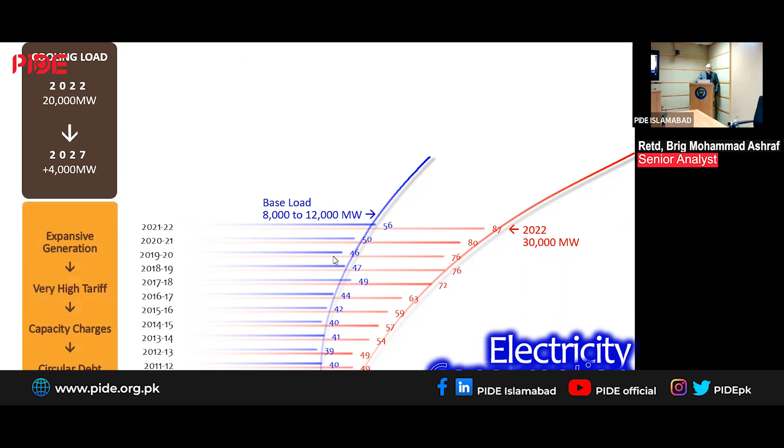Now this additional 20,000 forces the government to kick in the most expensive generation, where they generate electricity at about 80 to 90 rupees and have to sell it at about half the price, losing about 40 to 50 rupees per kilowatt hour. It also results in high tariff and capacity charges, because you have to maintain this capacity and circular debt.

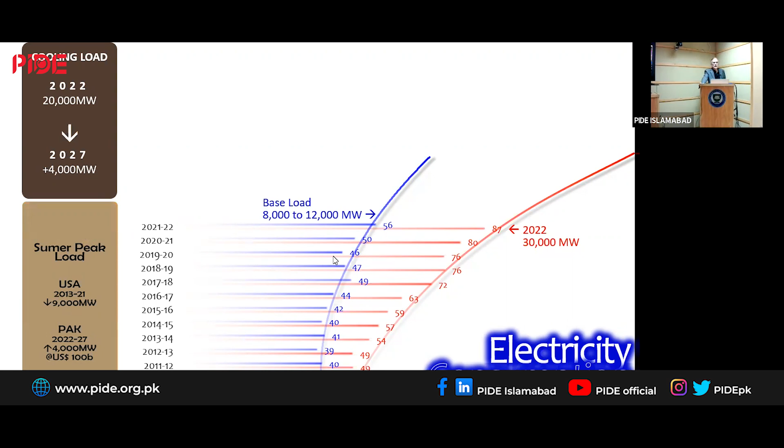Now, that is the starting point. Interestingly, once I started looking around, it was very interesting to see that the US in the past 8 years has actually reduced peak load by 9,000 megawatts, whereas Pakistan is set to increase peak load by another 4,000 megawatts in the next 5 years. That entails an investment of about $100 billion, which we don't have. So if it's not bad already, the worst is yet to come.

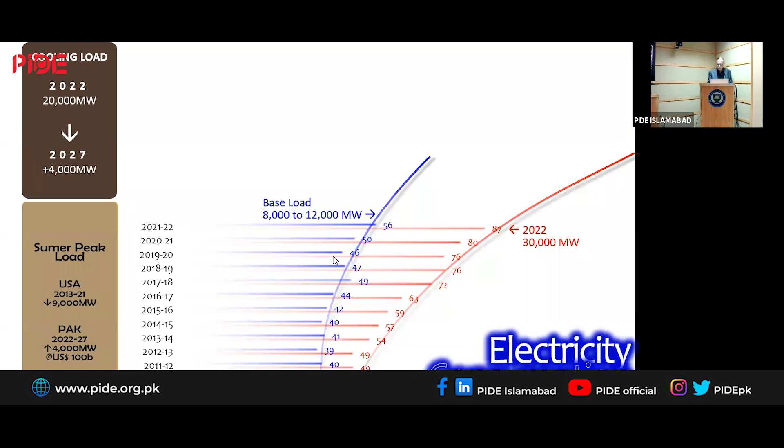And that is troublesome, obviously for economists and others, but also for housing. Now why am I focusing on housing? Because Pakistan happens to be the only country in the world where our residential or domestic load is far in excess of other categories like industrial load.

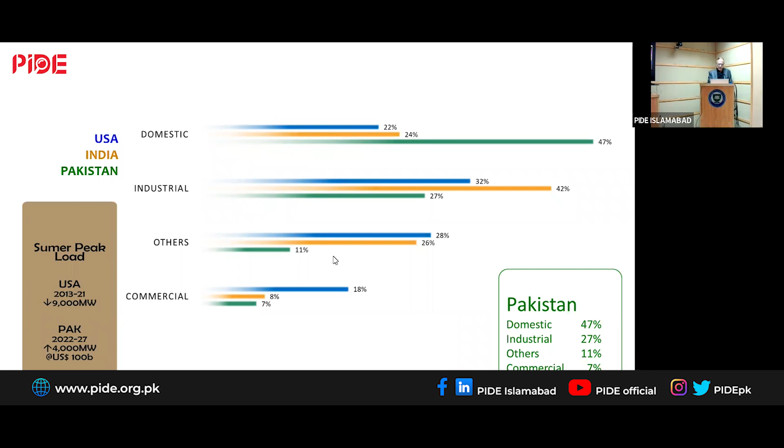As you can see here, the blue for USA shows 22% of entire electricity going to the domestic sector, India 24%, and Pakistan 47%. Now compare that with the industrial load figures, and you'll find we're consuming about 27% on industry and 47% on domestic load. This is a very unique situation, I think only in Pakistan.

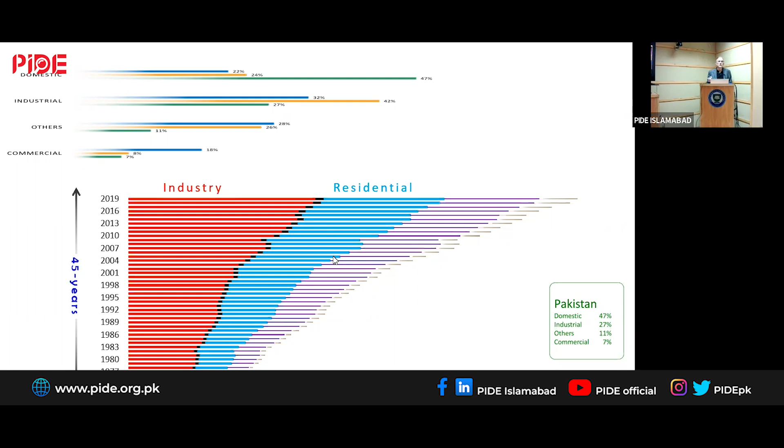I looked at about 45 years of EU data, and you can find consecutively the red bars are industry, which is almost more than twice the residential and other areas. So we have this issue of non-productive energy consumption, which is not adding to GDP but only going to the people, with tariffs going up. So this crisis is becoming, I think, primarily because consumption is on the wrong side of the equation.

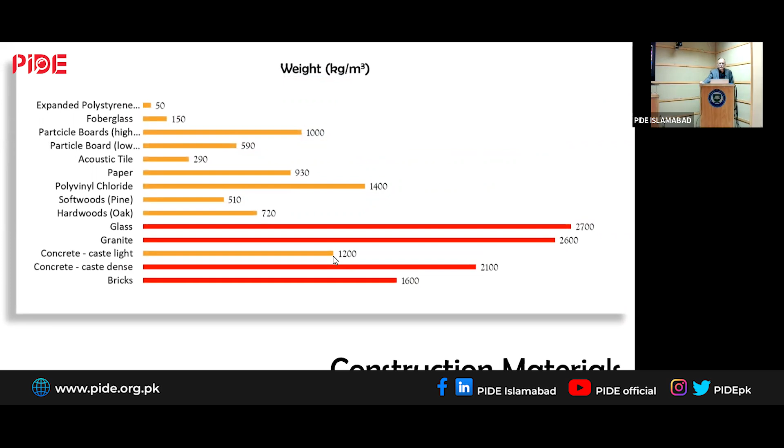Now looking a little deeper, this is how our construction materials are. Here you find those in red are the construction materials we use, and they also happen to be the heaviest in weight. That adds to one side of the problem.

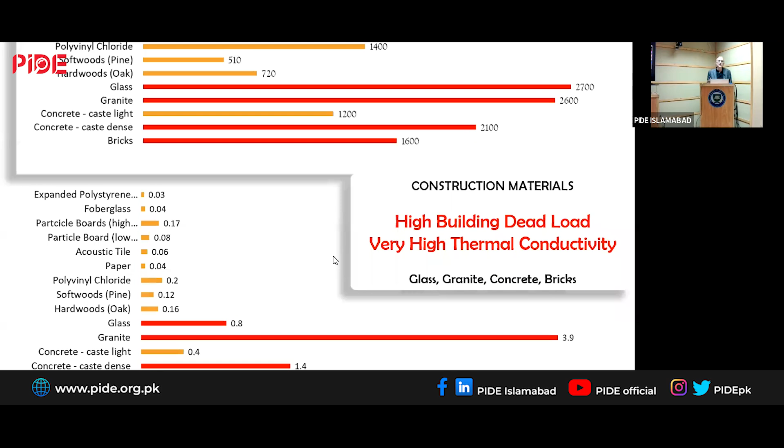The problem with the domestic sector is that in summers the demand rises very high, whereas in all other sectors like industry and agriculture, it's a constant demand. But this is where you have to build the extra capacity, which causes all the problem.

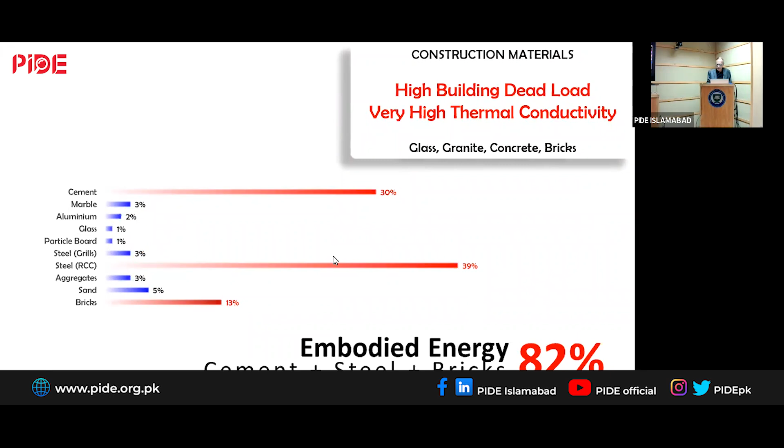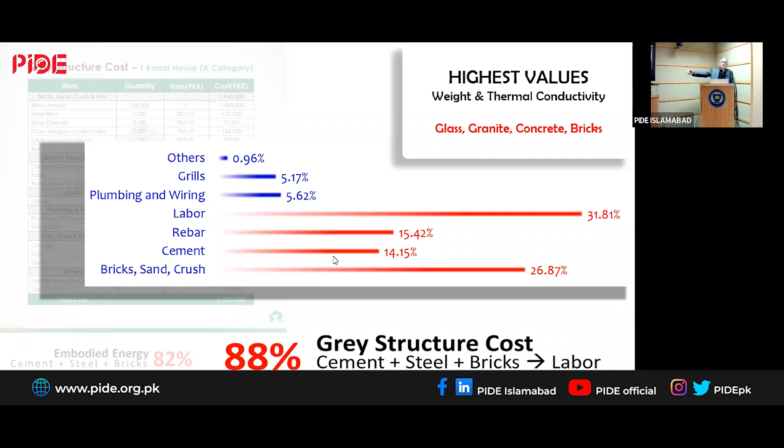Now let's take it further. Again, the construction materials we are using - cement, steel, and bricks - consume about 82% of the embodied energy, besides having high thermal conductivity. And if you look at the cost structure of the gray structure costing, 88% of the cost again goes to the same three elements - cement, steel, and bricks - which leads to extra labor cost. So we can conclude that the energy consumption in the domestic sector can be attributed to the construction material, which leads to the extra high labor cost.

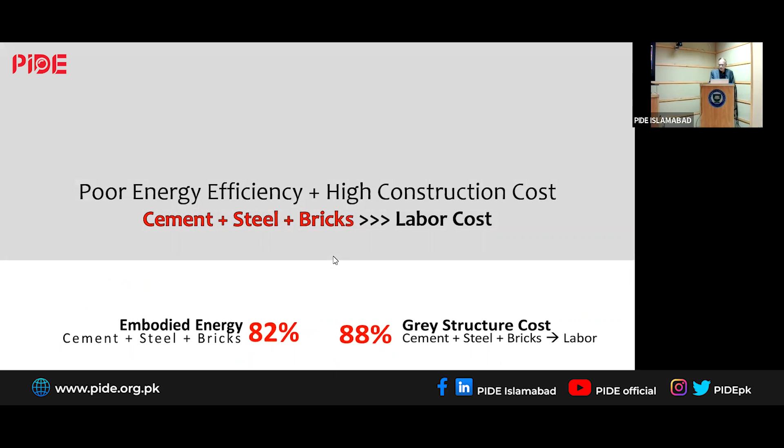And if we are able to look into this construction material, I think the problems will start getting into the solutions.

Now, incidentally, I look at it that we have one of the best opportunities. Our environment is very favorable, we have very moderate climate, we have abundant solar energy - something like 325 days in a year. Geothermal energy, I'm going to talk a little later, but Pakistan happens to be one of the most gifted, blessed countries, which we are not using.

And we do use very superior construction materials compared to what the West is using. They just put timber and some cement boards and put some insulation, and that is their house. We, on the other hand, use the material which only billionaires can afford in the West, but here we use it plentifully. So we are using superior construction material, but what we are getting is very high energy consumption and very high construction cost. So it doesn't make sense on both accounts.

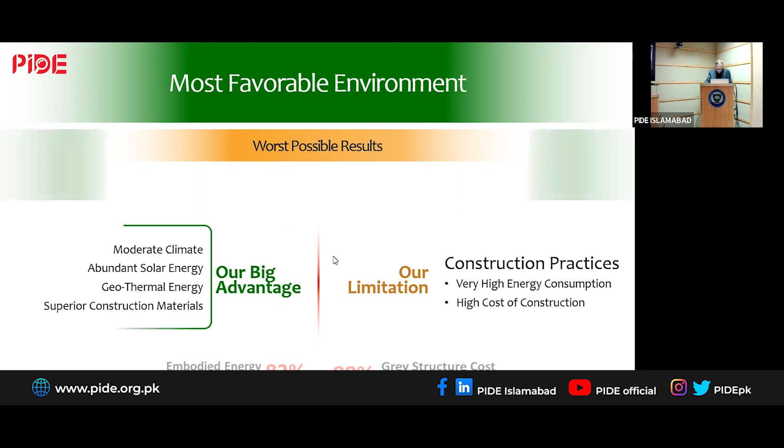Incidentally, I feel if we take advantage of the environment that we have and other things, we are in an ideal position to actually design some of the most efficient construction models here in Pakistan. And that is what we are going to try and come out with today. In this, we have to take advantage of the climate, the availability of solar energy, geothermal energy that is right here, and also the local material that we are using. Let's try and move towards that area.

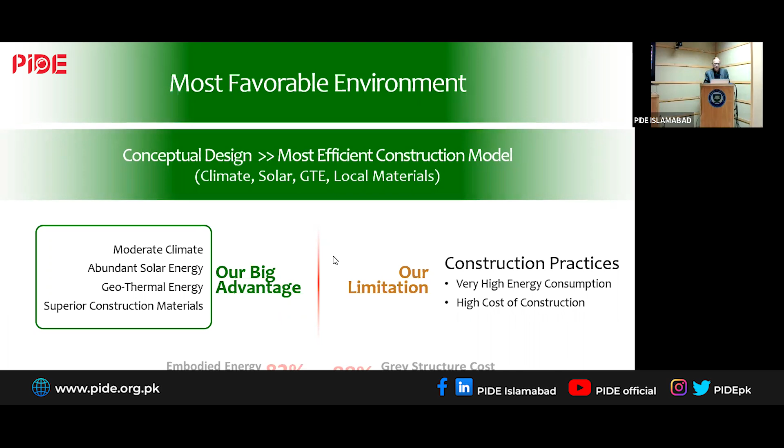Now, first of all, I am looking at what we can do with the traditional construction material and with existing buildings, which are made of bricks, mortar, cement and steel. I feel because of the very high thermal conductivity and the embodied energy that goes into it, if we just put an insulation envelope around this building, we can eliminate the impact of the weather, which actually affects the building and causes very warm homes during summers and cold during winters.

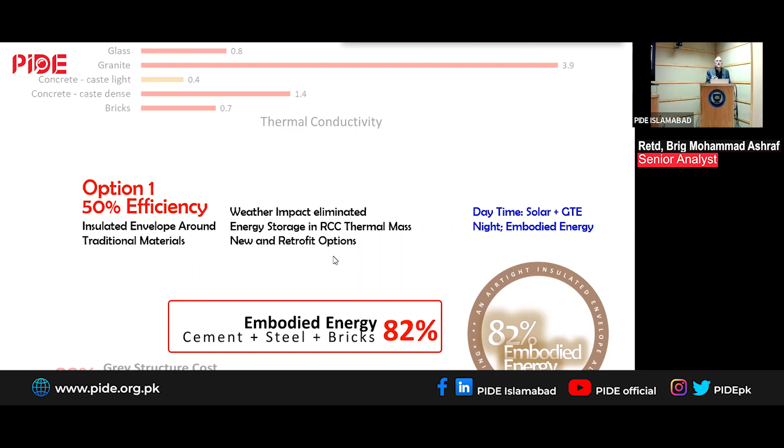And the classic example is the upper story of all our houses, which with the RCC roof, it's unbearable - even at 2 o'clock at night, it's not comfortable. And obviously the energy consumption is very high and the comfort is not there. But imagine if there was an insulated envelope around the building - this very embodied energy and the thermal conductivity would have helped you, as we are trying to do here.

So it is perfectly possible for us during daytime to use solar energy to drive one or two blowers, push the air - I'm not talking of water - push the air below the surface and then get a temperature differential of about 15 degrees plus. All this is running on solar. Once this energy goes into the building, it gets stored into the thermal mass that we build in, and that will last you for the night also. So that is how we are going to articulate this arrangement that I'm going to be talking about today.

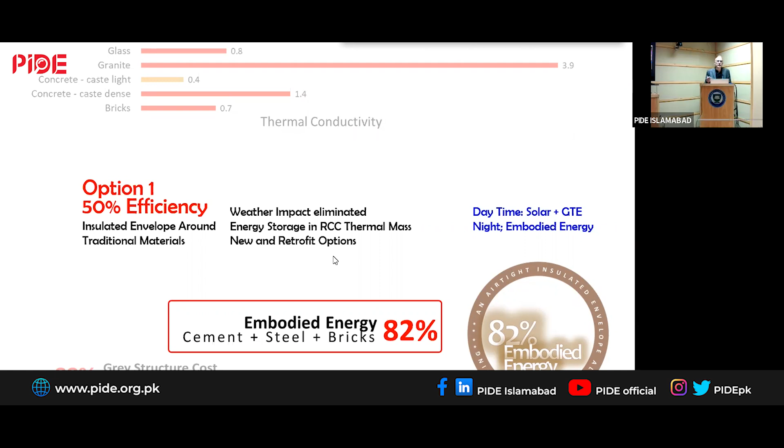The second proposition I have is actually adopting passive house standards, which envisage more than 90% energy efficiency. And if we use along with it some light construction panels and use RCC slab for the storage of this energy, we will end up in an arrangement where probably we should be able to have centrally air conditioned and centrally heated buildings at zero cost of energy.

So that is perfectly possible, I think. We are working on it, and probably, hopefully in a few months' time we'll start with some prototype in which we are going to test it together.

So during daytime, you're using solar and geothermal energy, and this energy is also being stored in the RCC floors of the building. At night time, that stabilizes the house inside the rooms. The construction time is also drastically reduced, which affects the labor cost, and obviously the cost impact is also there.

Now I'll just, for illustration, flash some of the construction materials which are available. Most of them are available in Pakistan. Some are not there, but they are cost effective and can be brought in if we are moving in this direction.

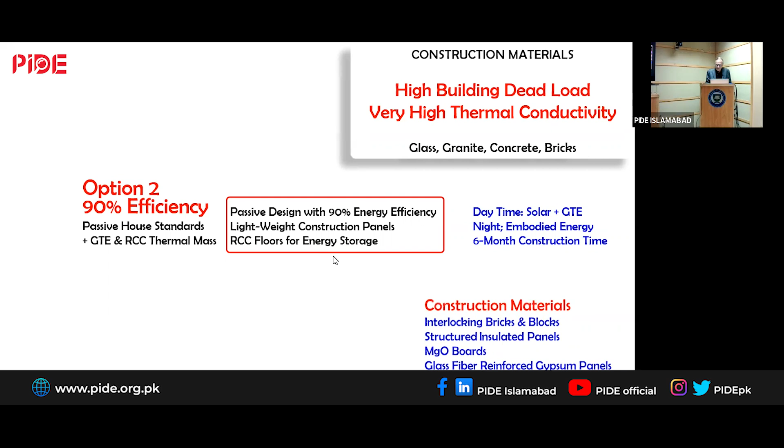The first is the simplest, which actually started being manufactured in Pakistan, but somehow or the other it hasn't taken off. This is interlocking bricks and blocks. You do not need plaster and cement for the bonding purposes, you can just place one brick and the next brick and it gets locked. It has a very good joint, and the laying time is about 14 to 15 times faster. The cost is less, and a very neat finish can be obtained from this.

The Boring Company is championing it. Elon Musk thinks that by selling these bricks at 1/5 the cost of normal bricks in the USA, he can recover the drilling cost through this particular method.

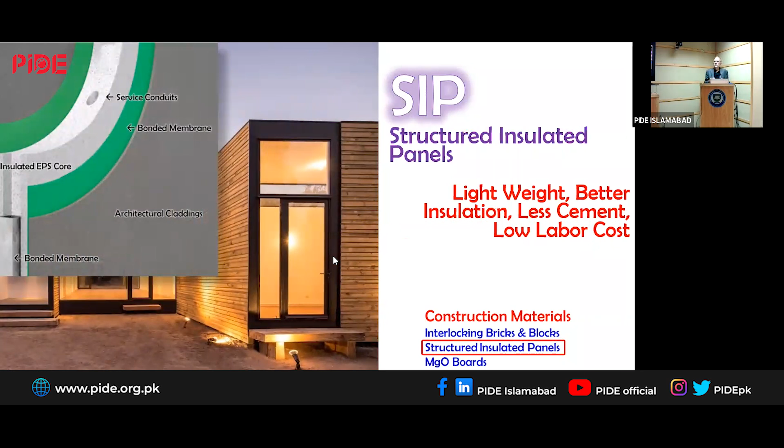So there are quite a few places, I'll let you know. In Lahore, there is a very modern plant being set up by one of the bigger industrial groups, and also there are some others at the local level.

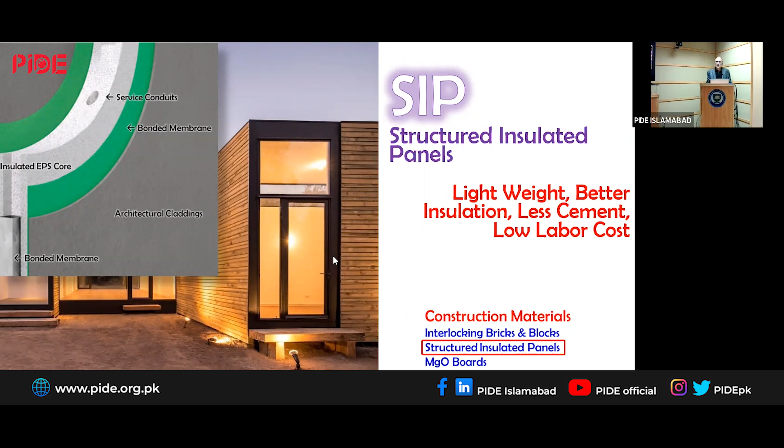Structured insulated panels: luckily there are quite a few, about half a dozen manufacturers in Pakistan. These are sandwich panels, which have insulation inside as the core, and then boards on both sides. It could be cement board, finished cladding or paneling, whatever it is.

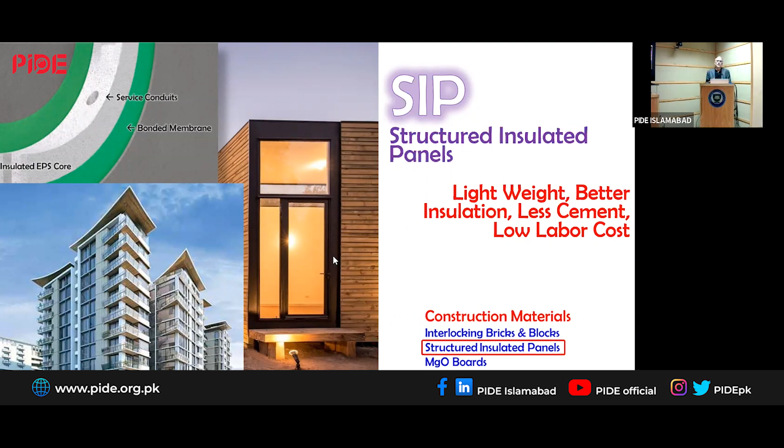Now, next I'm coming to magnesium oxide or magnesium oxide sulfate boards and panels. This is one of the best construction materials, and incidentally Pakistan does have sufficient magnesium if we want to get into it. This could save a lot of weight in construction, it provides very high insulation, it is practically fireproof, and the saving in cement and labor cost is also very appreciable.

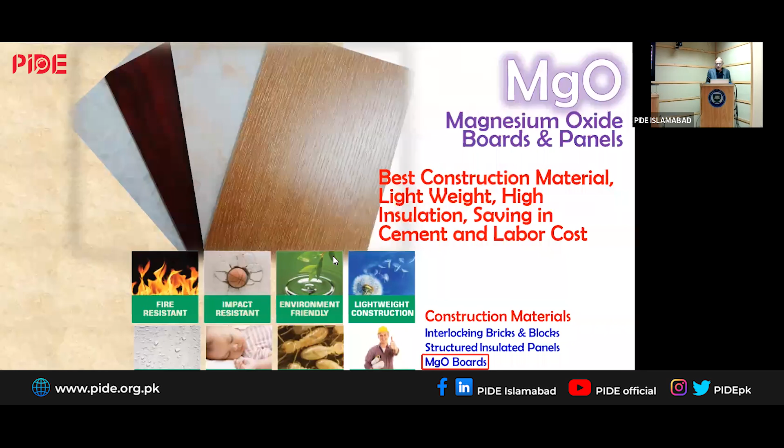Glass fiber reinforced panels: we all know that Pakistan has abundance of glass fiber reinforced gypsum panels, we have abundance of gypsum in Pakistan. This very technology was discovered about 20-25 years ago, and the patent holder happens to be a Pakistani scientist in Georgia. So he offered this technology free of cost to the government. Nobody showed any interest, so he ended up doing this in India.

And India today is actually benefiting a lot from this. The picture you find on the screen is also from one of the Indian projects, where you find a 4-story apartment block with these panels being erected. There's a huge saving in cost, huge saving. It's better insulation, it's very, very speedy, and the finish is also much better than that.

Especially for high rise, this is one of the best materials. We have a lot of gypsum, but we are wasting it, and this is one area.

In fact, I talked to Dr. Shahid Qureshi, and he suggested that 20 years back, it was the right decision, but today if you want to go for panels, then go for the magnesium oxide boards and panels. So we can leapfrog to magnesium oxide, but also we can use gypsum productively, far more productively than we are doing today.

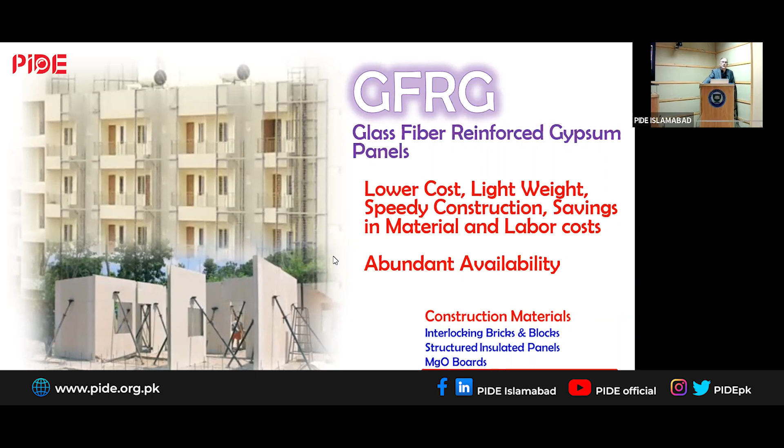Investment is also very low, and I think it's one of the things that should be coming to Pakistan sooner than later, especially considering the kind of situation the steel industry has in Pakistan.

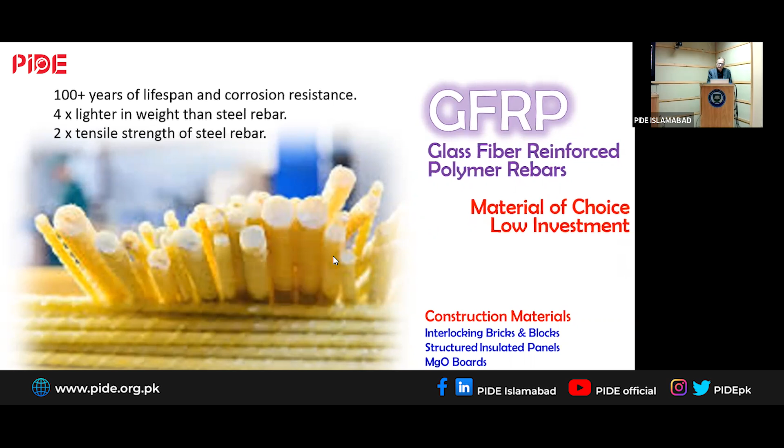Now, with this brief introduction, I'll be moving to the cost and some of the parameters that affect it. We see here saving in steel, cement, bricks, and labor, which reduces the overall weight of the structure and also the cost. Plus, it does end up providing comfortable and affordable living because of the low energy bills.

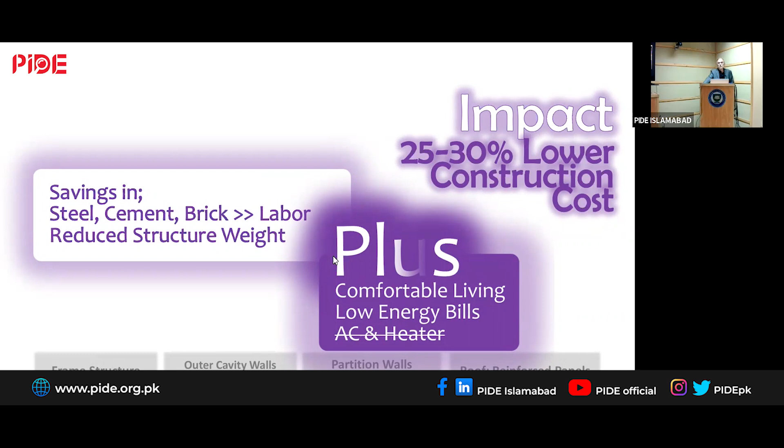And this was one area in which I've been working as a member of the team that I mentioned at LUMS. And this is a very balanced team of 10 professional people from all the concerned fields. And I think in about a week to 10 days, we'll be finalizing the technical options and plans, and hopefully moving forward to building 1 or 2 houses on this.

Now, I would just like to talk in terms of energy efficiency and the cost, the passive house, which I mentioned earlier. And you can see here, the energy consumption in a passive house is 15 kilowatt-hours per meter square per annum, compared to modern houses, which is 10 times more. And a leaky house, which is Victorian age houses, is 20 times more. So 5% of that. And these are the figures which pertain to UK research.

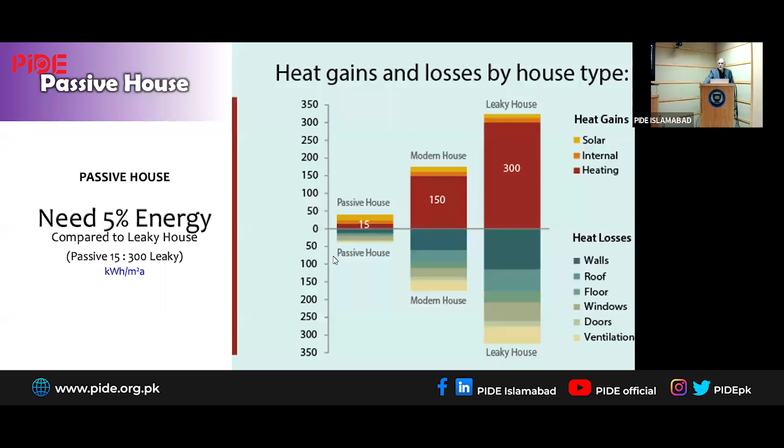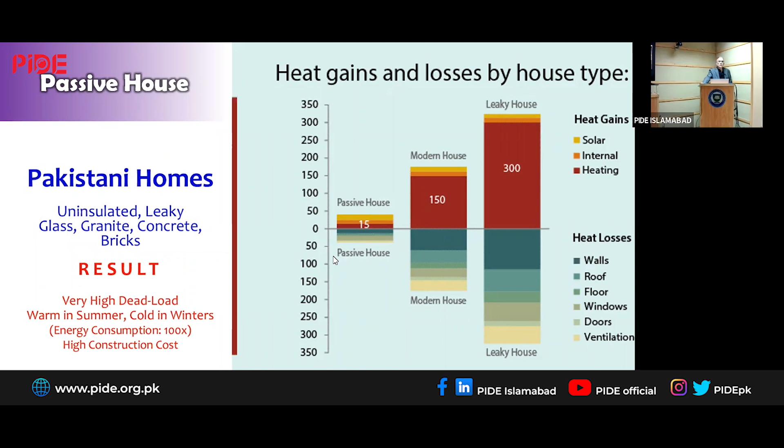Now, if I was to compare with Pakistan, not only do we have leaky homes, we also have uninsulated homes. So if we just multiply it by a factor of 10, I think that will be a very safe estimate to show how energy efficient our buildings and constructions are, and how much we need to do to move forward on this.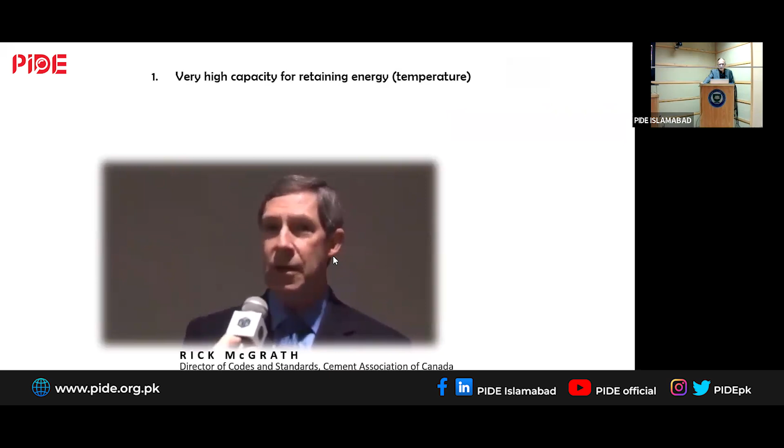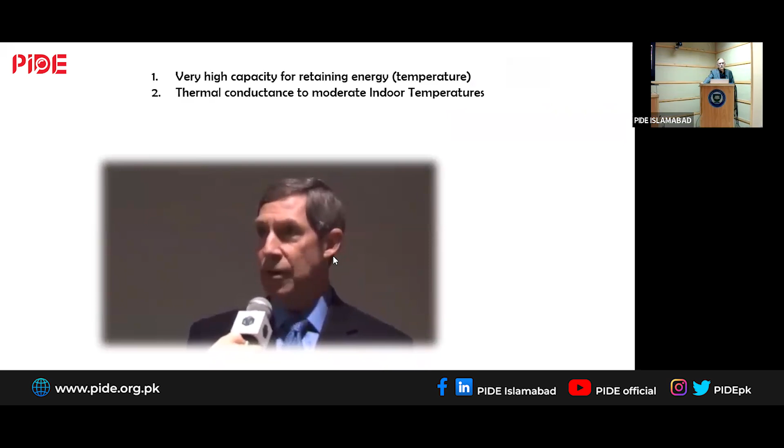This is another area I would like to draw your attention to. Concrete has this unique characteristic of thermal mass. It has a very high specific heat capacity, and also the thermal conductance required to moderate the indoor temperature requirements in our buildings. What we've found is that using life cycle analysis, we've been able to determine that concrete, with its thermal mass properties, is able to generate significant energy savings over conventional construction, in the order of 70% energy reductions for the service life energy use in our structures.

Too many times we focus our attention on the initial embodied energy that goes into putting a structure in the ground, when in fact, in the vast majority of cases, this represents less than 10% of the total energy that will be consumed by that structure over its 60-year service life.

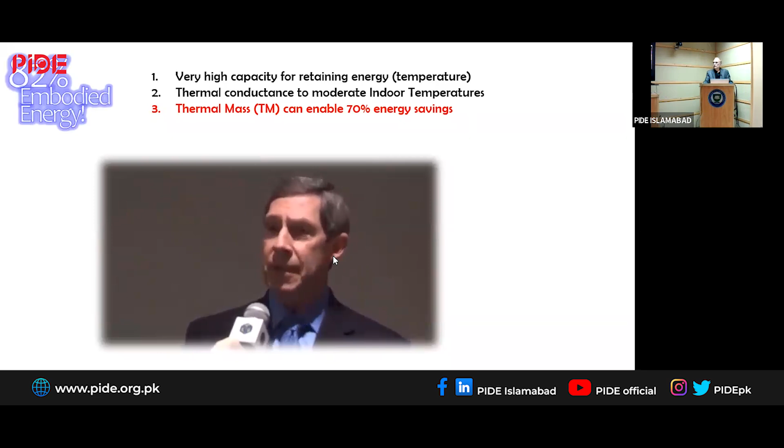The characteristic of concrete is that when you couple it with geothermal energy sources, which is energy available immediately below our feet in the crust of the earth, we are able to temper the fossil fuel energy demand in heating and cooling our structures to the point where we can develop 70% energy savings in our concrete structures.

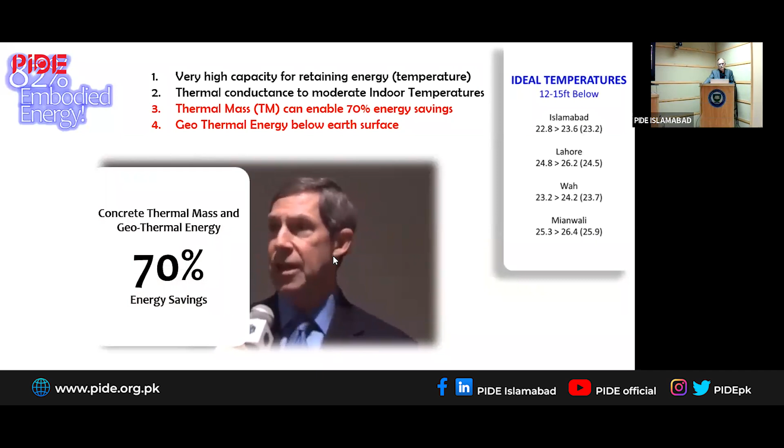Now, if you look at this table on the right side, which shows the temperature we have in Pakistan in 4 different locations, 12 to 15 feet below the surface. These are the ideal temperatures you would like to have inside the room. And this is only 12, 15 feet down. Now, this very temperature in Chicago is at about 2,500 feet. And likewise, in the West, nowhere is it less than 2,000 feet.

And for that, they have to drill, which is a very heavy cost. And then they have to pump water because air is not efficient. And then lifting water 2,000 or 3,000 feet up is a huge cost, and then circulating and managing it. We don't have any of that. We can go to waterless geothermal heating and cooling. And this is one of the best places in Pakistan.

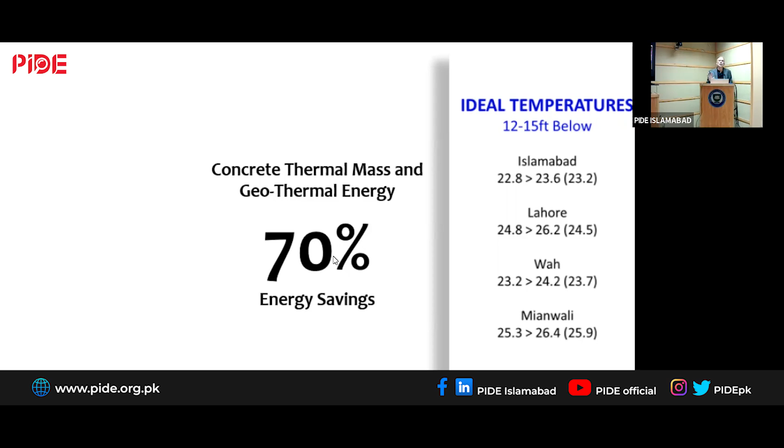The cumulative production of the 10 top geothermal energy players in the world is about 13,000 megawatts. Pakistan has a potential of more than 100,000 megawatts. So that is where I am trying to say that if we can combine solar energy with geothermal energy, and we have a structure which preserves the temperature inside, we can actually have very comfortable living at zero cost for heating and cooling.

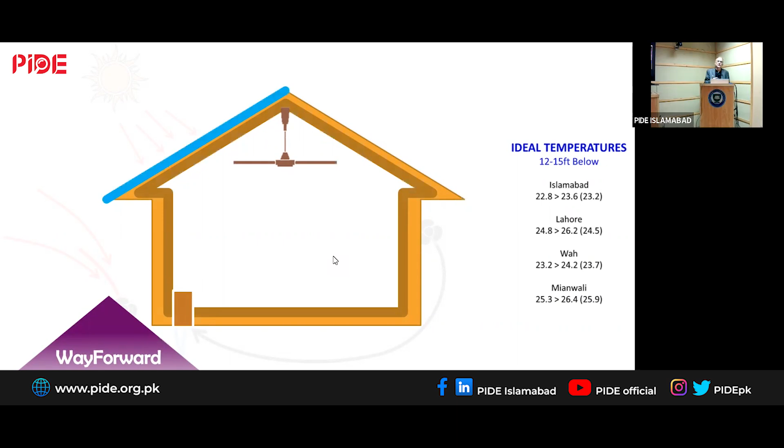Now, let's try to move into that. And that is how I like to explain here. We have to start with the airtight insulated room or building. So that is the starting point. If it is leaky and not insulated, obviously we'll have cooler homes during winters and warmer homes during summers, as we are seeing today.

What you need here basically is put a small solar panel, about maybe 4 or 5 kilowatt per hour capacity. It is needed to drive 2 or 3 blowers, about 500 watts each. They will pull the ambient air, let's say at about 45, 50 degrees, push it down 200 to 300 feet. Or if you have a horizontal choice and a bigger place, then it can go only about 15, 20 feet and go about 300 to 400 feet running length.

And there, the temperature in Islamabad is 23.2 degrees. So you expose it and let it stay there for a while till it reaches a temperature, let's say about 30 degrees or so. You bring it up, and then you have an auxiliary cooling system, which could be again very cheap. It could be evaporative coolers during summers running on the same solar power.

Or you can have passive solar heaters which can run without any electricity connection during daytime, and one particular unit, 8x4, can heat about 1,500 square feet in a freezing sunny day. So that kind of facility is available to us by nature. And then if somebody wants to put in a heat pump, again, can put it in, could stabilize another 4 to 5 degrees. Now, all of this we will be doing during the daytime.

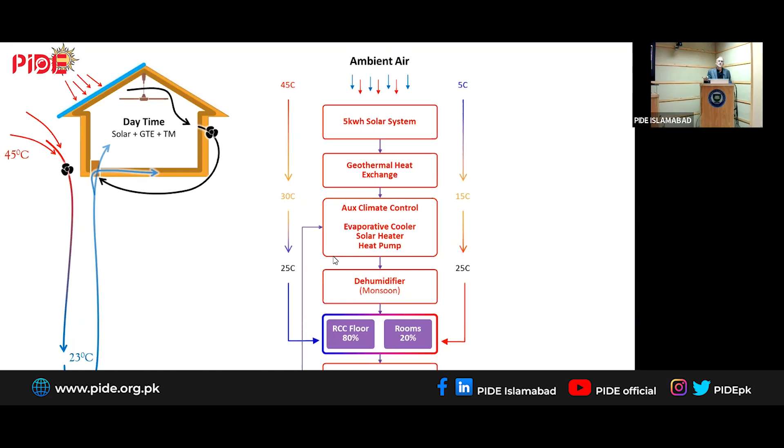Once you have done that, at night the system will shut down, and this very thermal energy that you have stored in the RCC slab will stabilize the temperature, as we heard the gentleman from Canada saying. And at night, as I've mentioned, the same energy which was stored in the body of the house, the RCC floors, and maybe brick walls and other things, will stabilize your temperature, and maybe a fan will do for the night. And this will be both during summers and during winters.

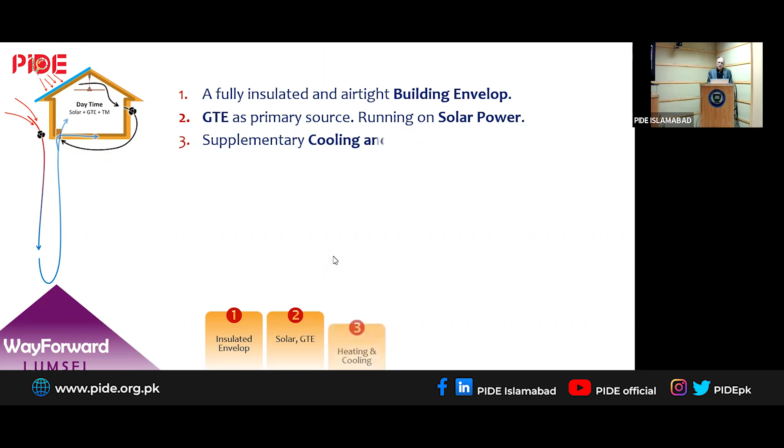So just to sum up, first we need an insulated envelope around the building. Then we need to exploit the geothermal energy and use it as a primary source of heating and cooling, powered by solar energy. Supplementary cooling and heating could be used, which will bridge about a 5 to 6 degree gap if there is any, and these could be multiple choices. And then we are using RCC floors, and the main idea is to use the RCC thermal mass for storage of energy during daytime, and stabilize the temperature at night time.

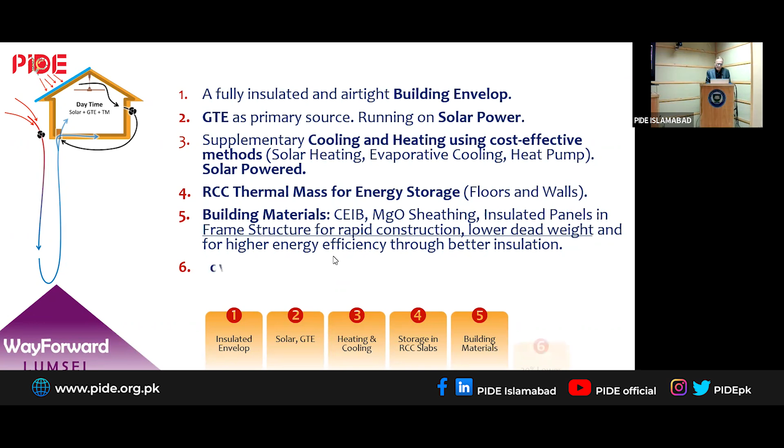The building material I've mentioned will lower the structure weight by at least 50%, which will have an impact on all the frame and the construction material. Like the example of the high-rise building right here in Islamabad, where they were allowed to add 3 more floors, and that obviously was a very profitable decision. And the construction cost and labor cost would be, I'm thinking, about 30% minimum down. So now just look at it.

Now these 3 on the left, insulated envelope, heating and cooling, and building material, pertain to the passive house building. They're the key elements of the passive house standards. What we are doing is adding to the passive house standards the solar energy to drive and use the geothermal energy, store the energy into our slabs, and then reduce the cost also.

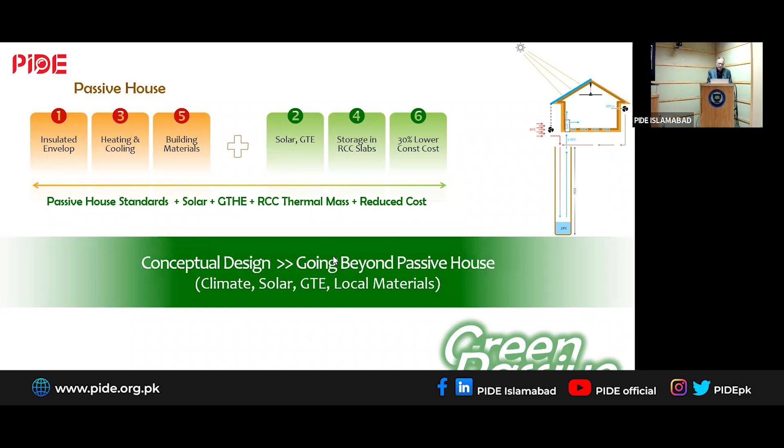So I would say this is a design which is even better than the passive house design, which is considered to be one of the best designs or concepts today. So we can leverage this for our advantage. And I was referring to it as green passive or whatever it is. And so there are obviously inbuilt inherent advantages of it.

Once we have identified that the domestic sector, or the residential sector, is the main cause for the energy crisis in Pakistan, we are going right into that. There is an incentive for the house owners, actually, in terms of a very nominal expense for very comfortable living. So I expect many people could be going into that.

The corporate sector could see this as an opportunity also, because it has a local market and national market attraction. And very important is that we will be, I think, having a very favorable impact on the environment, on greenhouse gas, and also the heat island effect, which is taking place in Pakistan. In our bigger urban centers, temperature has risen about 5 to 6 degrees centigrade in the past 10 years because of excessive air conditioning and urbanization.

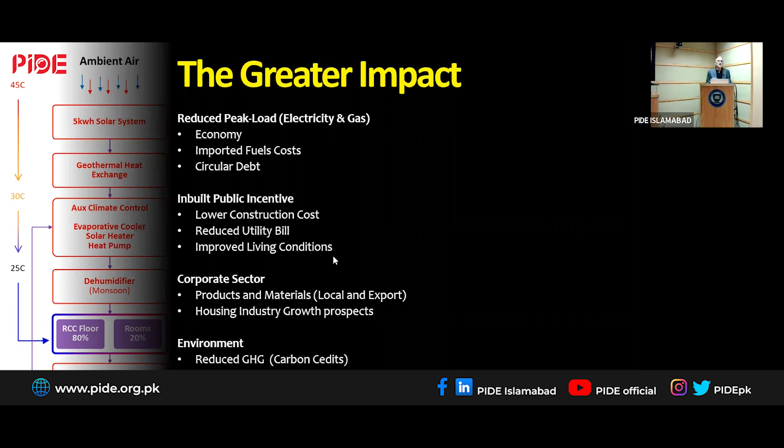And there is, I think, a role for academia, which hasn't been very praiseworthy in this. There was no lead coming from academia. I've been talking to many very renowned people in this sector, and hardly anyone actually had an idea of these things. The corporate sector, of course, can see the opportunity and develop the capacity, and the state, I think, can offer stimulus because there is space for them.

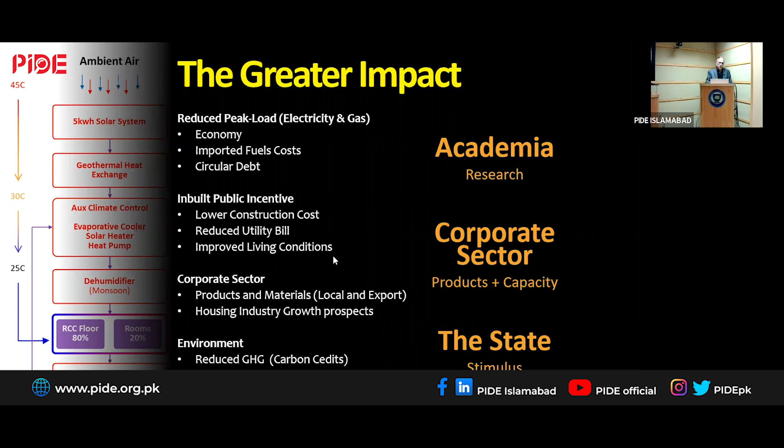Instead of selling energy or electricity during summer peak hours at a loss of about 40 to 50 rupees per unit, they can subsidize maybe property tax or offer other incentives so people can come in. So this, I think, is a very good proposition in which everybody is a winner, and also the environment. So that was briefly the description of my thoughts on these subjects.

Clearly enlightening. So have you calculated the cost? How much extra cost at the initial stage are we looking at for doing this ditch and the other insulation stuff? Yes, we have been looking. Obviously, cost is a very important consideration. And what I found is that the overall cost is about 25 to 30% lower compared to normal traditional houses, because there'll be a very significant reduction in steel rebars, cement, labor cost, and also bricks.

If you're doing the partitions with panels, as this high rise in Islamabad is doing, that again can bring down the weight and everything else. Also, there'll be huge savings because you'll not be putting air conditioners, not more than one per floor certainly, and also heating appliances. Those are a fair amount of investment in any building.

And these days, to offset utility prices, we are putting large solar panels on top of the roof. Here, where energy consumption is 90% less, if you were to put a 30 kilowatt solar system, you'll probably end up doing 5 kilowatts. So if you look at the saving, not only in construction cost, but if you're living there with your family and it is centrally heated and centrally air conditioned, you're paying under 5,000 rupees. So the value is more than 100,000 per month that you will be saving. So cost is a very important thing, and that is coming into this.